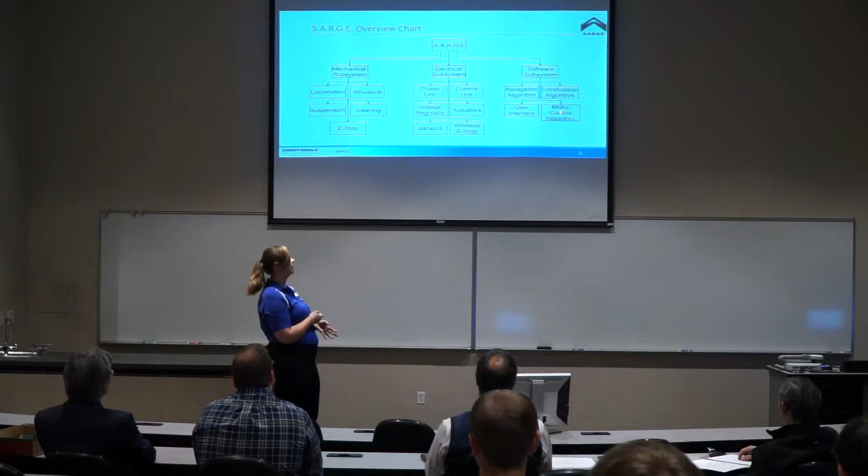So S.A.R.G.E. has several requirements, but there were some that were just too broad to fit into a specific subsection. So we put them in our overall system requirements and specifications. The first is that we need to build the robot entirely by the team. IGVC allows us to start with a pre-made system and build up from it, but because this is capstone, we wanted to start from scratch, build from the ground up, so we get to learn every aspect of it. The second is to stay within budget.

We have a total budget of about $6,000 for our robot. That includes money from URI, thank you very much, the College of Engineering, and a private donor. Our third is to complete an IGVC course run. A lot of teams go to the IGVC and they don't even make it through the course. Last year, the third place winner made it 44 feet into the course. So our goal is to at least make it around once, and hopefully after that, beat the time from last year, from the team who didn't make it around.

Our fourth, as I already talked about, is our search and rescue purposes. We really want this to be something that will work after capstone, not just competition oriented. And as I already stated, that includes having the payload of survival supplies, having the ability to walk survivors out within a 1.5 kilometer range, and then being able to create communication between survivors and rescuers in a 50 kilometer range, probably through a walkie-talkie or something like that.

And then finally, our last requirement is to win the competition, which is a very vague statement. But that means completing the course in under 4.01 minutes, because that was the winning time last year for IIT Bombay. We want to get 85% of our design competition points and 70% of our interoperability profiles challenge, which hopefully again should place us at the top.

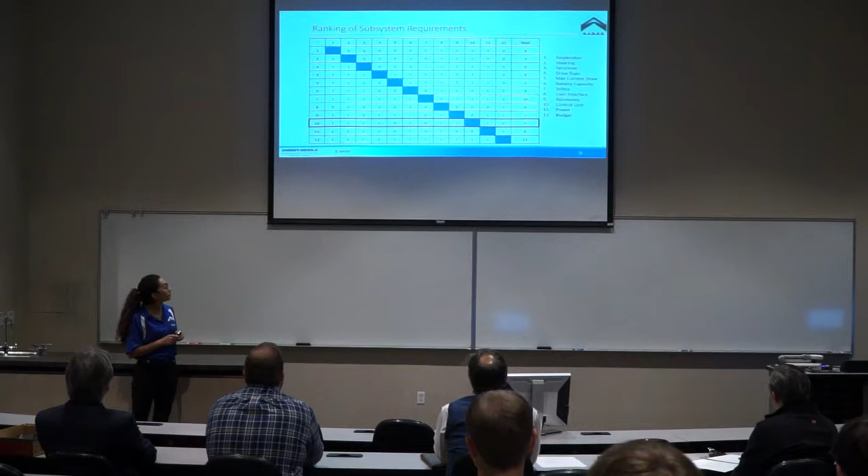So to explain this table a little bit more, we're going to pick an example, which is the control unit. So here you can see that in the first cell, we evaluated the control unit with the suspension, and we gave it a 1. We did the same thing for the steering and structure. And then for number 4, we evaluated the control unit with the drivetrain, and we thought the control unit was less important than the drivetrain. Therefore, we gave it a 0. So after that, we just sum up the row, and then we end up with the total score. The maximum total score we could get is 11. So for the control unit, we got a score of 7.

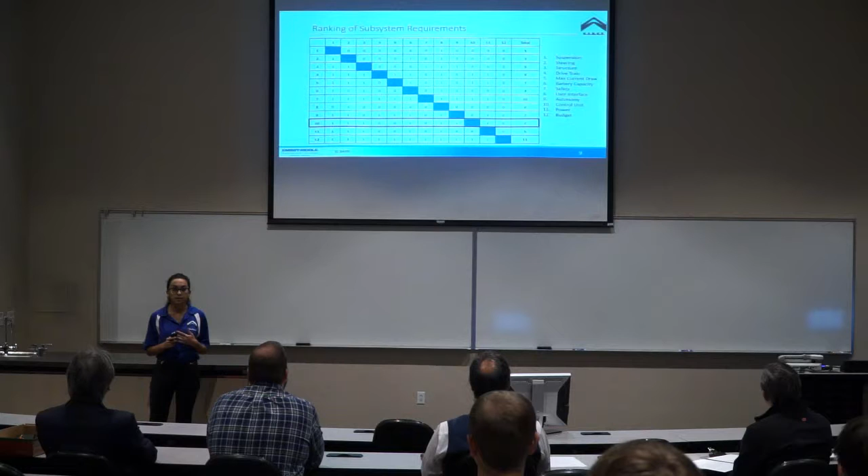So in this table, you can see that the budget has the highest score with an 11, and safety has the second highest score with a 10. So these total scores will help us rank the requirements. Here we can see that budget and safety have a percentage of 20%, the drivetrain 15%, 7% for control unit, autonomy, and maximum current draw. We give 6% for structure and power, 4% for battery capacity and steering, 3% for suspension, and 1% for user interface. And you can see that the total comes out to be 100%.

And now I'll pass it on to Matthew.

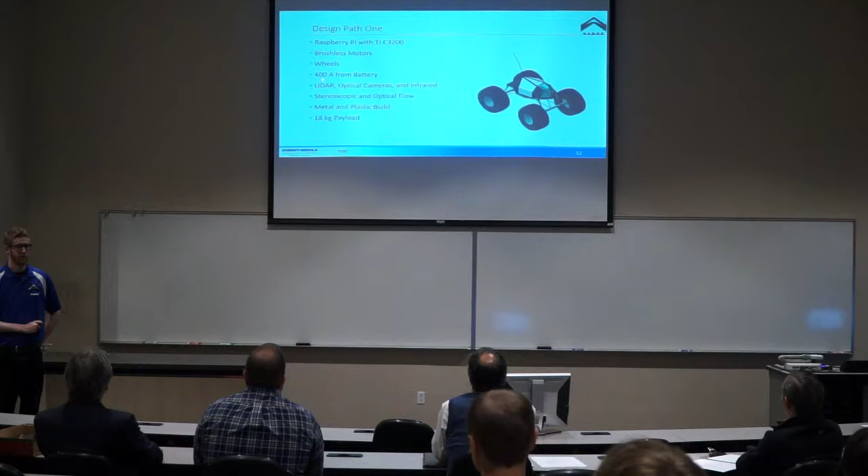To reiterate, design path 1 would be using the Raspberry Pi and TI CC3200 for Wi-Fi communications, brushless motors to operate the wheels pulling 400 amps from the battery, LiDAR and optical cameras for stereoscopic and optical flow algorithms, a metal and plastic build, and supporting 18 kilograms of payload.

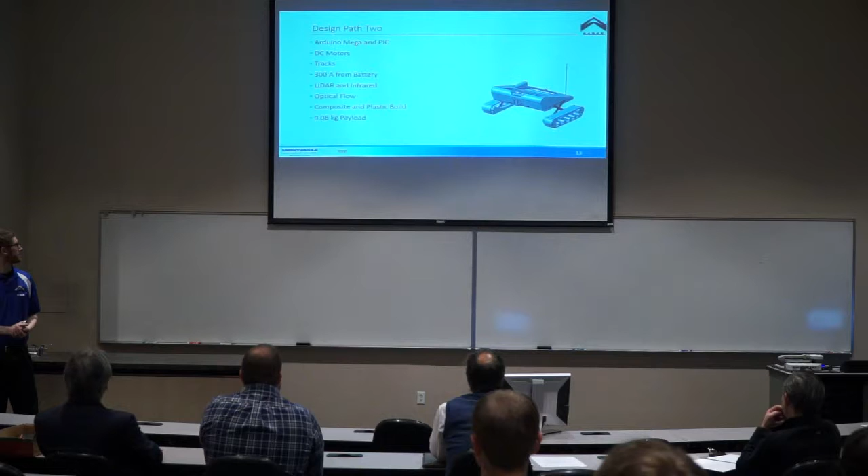The second design path that we considered is using an Arduino Mega and PIC microcontrollers, DC motors to operate the tracks, 300 amps being pulled from the battery, LiDAR to incorporate optical flow algorithms, infrared sensors, and a composite and plastic build supporting 9 kilograms of payload.

Our third design path is using the Raspberry Pi and BeagleBone, AC motors to operate the wheels pulling 200 amps from the batteries, using optical cameras for the stereoscopic algorithms and infrared sensors, a metal and composite build, and 18 kilograms payload support. I'm going to pass it back off to Morgan, who's going to summarize our design paths.

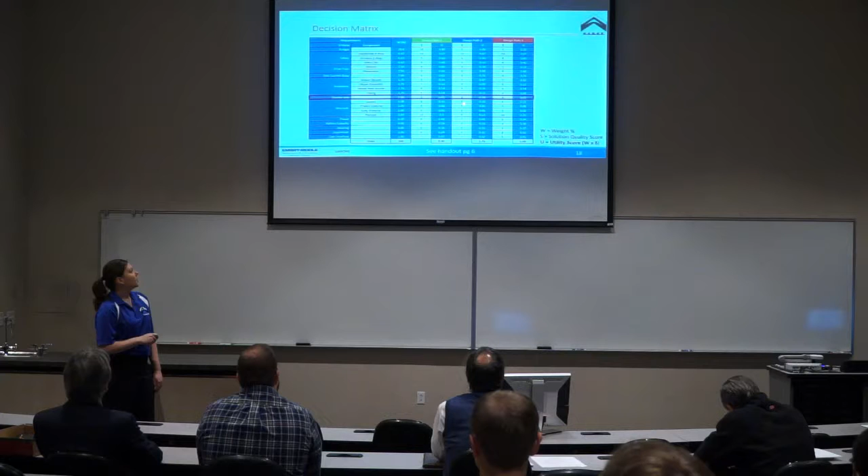To do this, we multiplied each score for the component or criteria by their associated weight to give us a utility score. Continuing with the control unit example, for design path 1 and 3, we gave it a score of 9 multiplied by a weight of 7% to give us a utility score of 0.63. For design path 2, we gave it a score of 8, once again multiplied by 7%, to give us a utility score of 0.56.

We did this for each of the components and criteria respective to their design paths, and then summed up each design path's utility score to give a total utility score. We then determined which design path had the highest total utility score, which, as you can see, is design path 1, which has a total utility score of 8.80. Therefore, we chose this design path to implement, which was stated previously.

Additionally, it will have a 4-link suspension and a linearly actuated steering system. And I will now pass it off to Grayson for the mechanical subsystem.

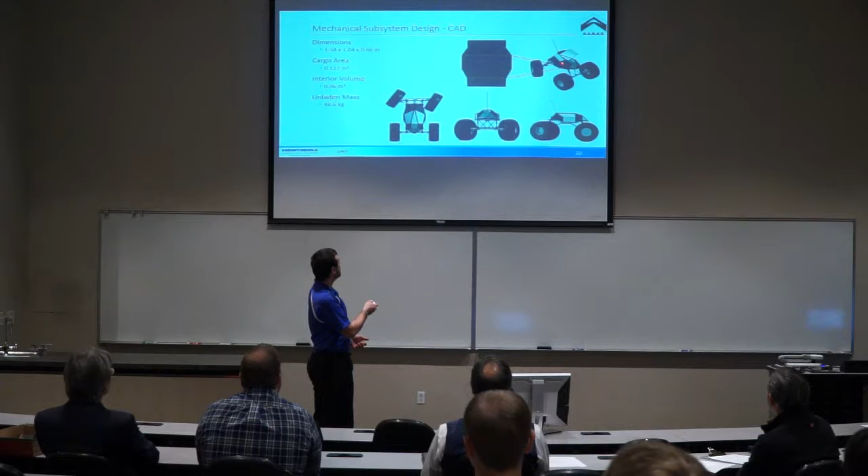Here's a current CAD model developed inside CATIA for our prototype. The dimensions of this vehicle are 1.34 meters long by 1.04 meters wide and 0.66 meters tall. In this model, we have a cargo area shown here in this blown out view that has an area of 0.127 meters squared and a total interior volume of 0.06 meters cubed. The unladen mass is 48.6 kilograms for this vehicle.

For the finite element analysis, we looked at 4 main components that we'll show in this presentation today. We took into account welds for this to get a more accurate simulation, so we implemented fillets into the model, and then assigned the correct materials to each of them. For this first one, we used an aluminum 6061-T6 and also implemented this cross section here throughout.

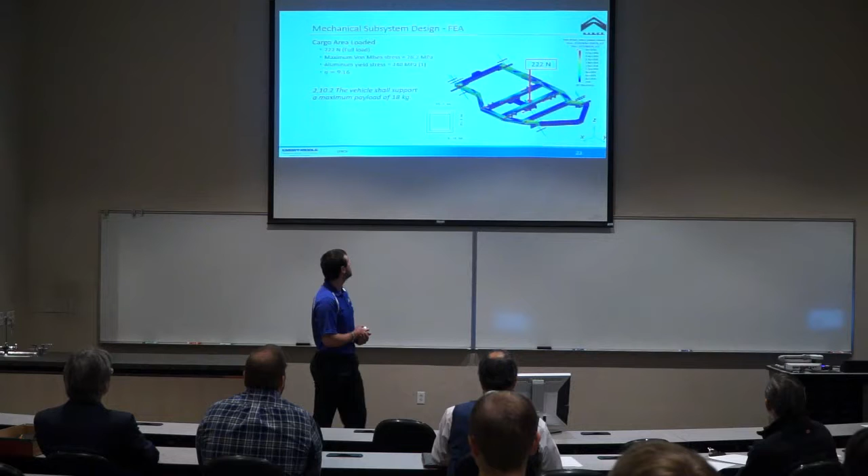We were analyzing to see if we were within our requirement 2.10.2, that we would be able to support a maximum payload of 18 kilograms. So that's what we implemented as a 222 Newton force, shown here. We found in this analysis that the maximum von Mises stress was 26.2 megapascals. The aluminum that we have chosen yields at 240 megapascals, so that gives us a factor of safety of 9.16.

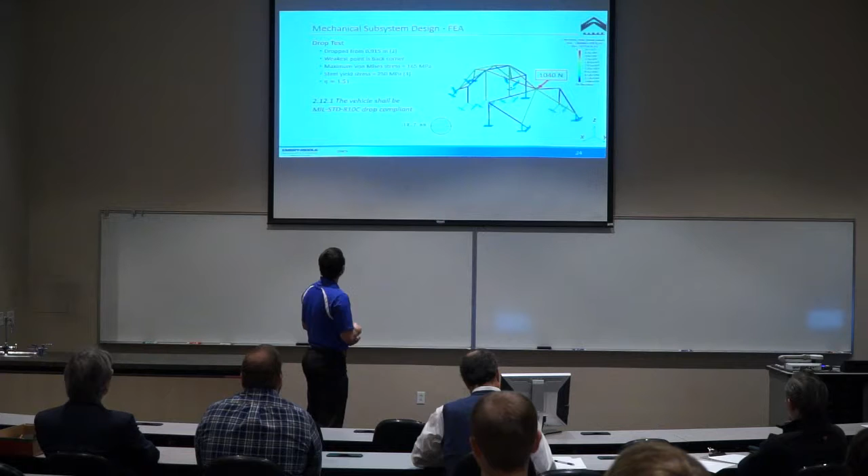For our second finite element analysis, we looked at the roll cage. Specifically, we wanted to make sure that our roll cage would match our requirement 2.12.1, that our vehicle would be compliant with the military standard 810C. This requirement specifies that a vehicle of our size must be dropped from a height of 0.6 meters or lower and still be fully functional after the drop.

So in order to account for this, we dropped it from the back on top of the roll cage at the weakest point shown here. This is the entire mass of the vehicle on this thing, so that comes to about 1,040 newtons of impact. We dropped it from a height of 0.915 meters to take into account any extra, and to make sure that we will fulfill our requirement of 0.6 meters.

The maximum von Mises stress found in this analysis was 165 megapascals, and this roll cage is made from a steel that has a yield stress of 250 megapascals. This gives us a factor of safety of 1.51 for our design.

For the third finite element analysis, we looked at the axle. We wanted to make sure that the axle will be able to support our robot at full load statically, and we found it was able to. We calculated that the axle would have 400 newtons of force on each tire when at full load of the robot, so the maximum von Mises stress was only found to be around 6 megapascals.

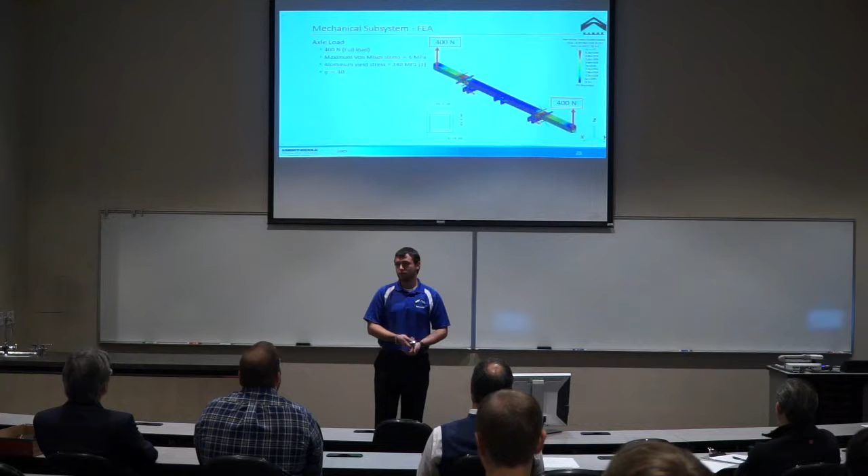The aluminum is the same aluminum we used in the chassis with the same cross section shown here, and it had a yield stress of 240 megapascals, so that gives us a factor of safety of 40 for this part. Should be plenty enough.

For the final finite element analysis, we looked at the total suspension system inside of ANSYS. We wanted to make sure that the linkage arms shown here would be able to withstand the inertial forces of the robot at full speed and at maximum turn, that's 2.2 meters per second at 50 degrees turn on the wheels.

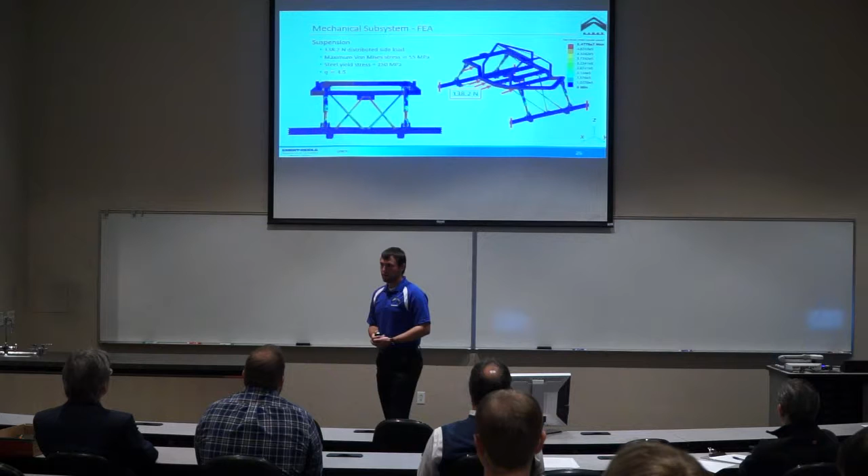We calculated that the inertial forces in the body would be 138.2 newtons, which we distributed along the force here. In this calculation, we found the maximum von Mises stress to be around 55 megapascals. Again, these links are made from the same steel as the roll cage, which has 250 megapascals of yield stress, so this gives us a factor of safety of 4.5.

I'll now pass it on to Chad to speak about the kinematic simulations.

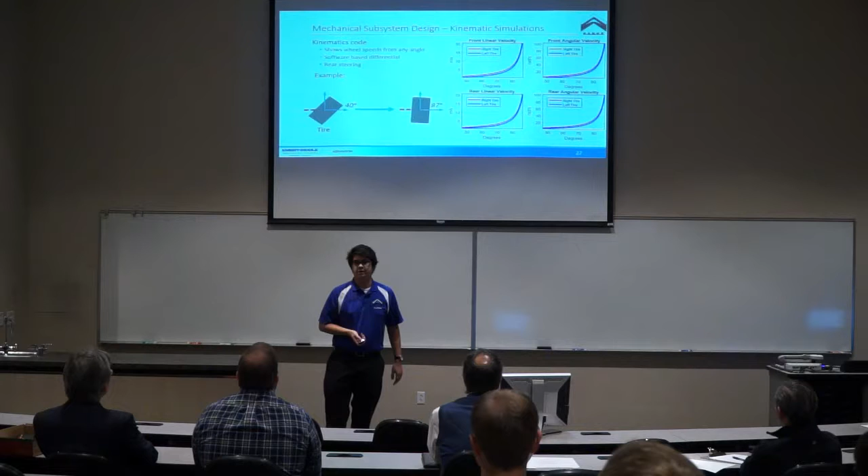Thank you, Grayson. So we ran some kinematic simulations of our robot on MATLAB, and the kinematics code shows the wheel speeds on a full turn going to a straight turn. Being that each wheel is independently driven by its own motor, we are implementing a software-based differential instead of a hardware or mechanical differential typically seen in automobiles. We are also putting the steering system on the rear axle.

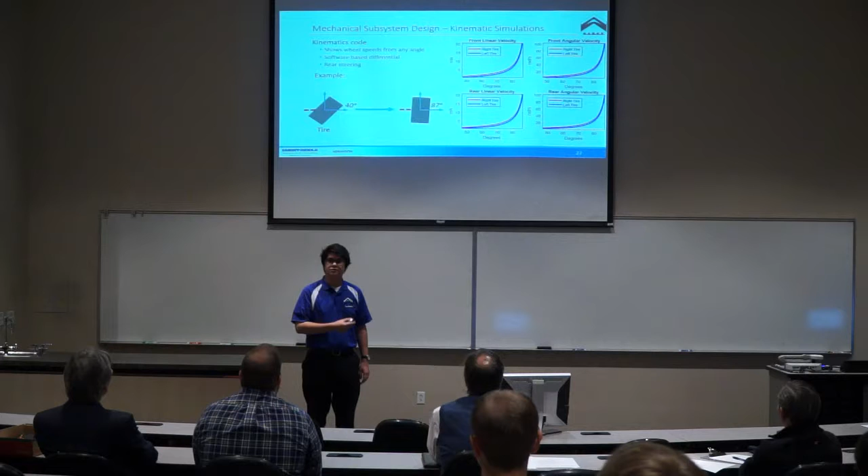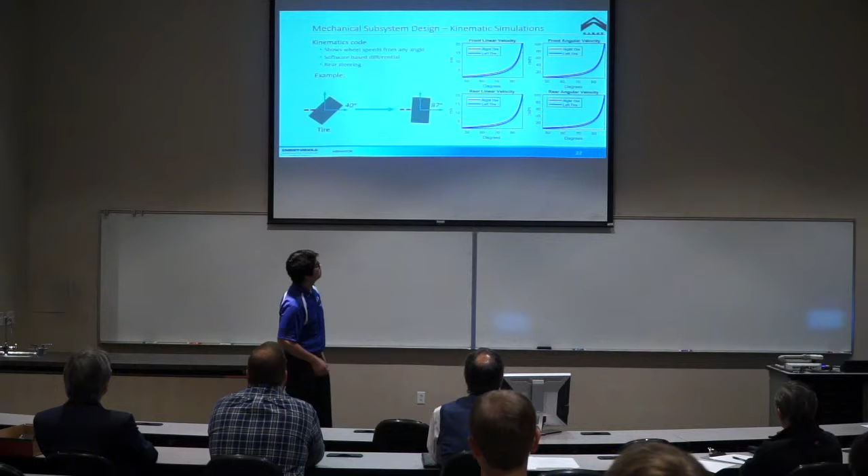So this robot is undergoing a left turn in the simulation, even though it shows that the wheels are turning right. In this simulation, the right side tires are shown in red, the left is shown in blue, and throughout this left turn, the right tires are moving faster than the left, which is as expected. So we know that our simulation is correct. These two graphs right here show the linear velocity in meters per second, and these two show the angular velocity in radians per second.

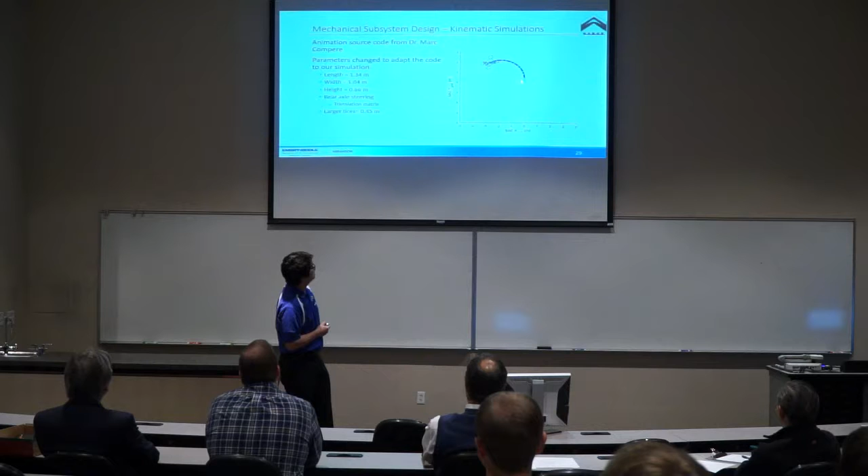Here is an animation of the kinematic simulation. The animation source code came from Dr. Marc Compere, a professor at Embry-Riddle-Daytona. The parameters we changed on this code are the critical dimensions of the robot: length, width, height, and tire size, and we changed the steering axle to the rear, which was accomplished by modifying the translation matrix. The purple dotted line shows the center line of the front axle, and the light blue line, a little hard to see, shows the center line of the robot itself. You can see that they are offset, so our simulations are moving as we expect.

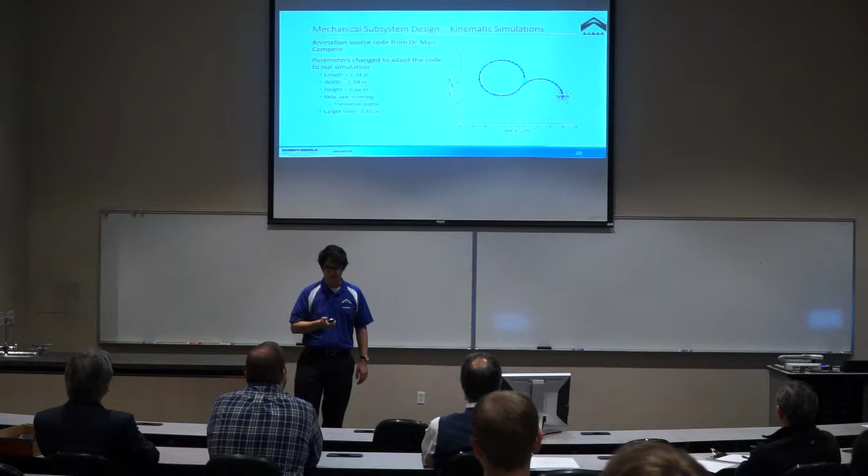For our motors, we are going with RacerStar 6368 brushless DC motors. We will be attaching their output shafts to a planetary gearbox with a gear ratio of 100:1. The resulting peak torque per motor is 169.5 Newton meters, and the nominal or standard operational torque of these motors is 59.3 Newton meters. The total nominal torque of the robot, multiplied by the 4 motors we will be using on each wheel, comes out to 237.2 Newton meters, which satisfies our specification 2.2.2, where we say the actuators shall move the robot with a total minimum torque of 160 Newton meters.

For the steering system, we're using an electronic linear actuator from Firgelli Automations Incorporated. This linear actuator has a maximum pushing force of 750 newtons, and it moves at a speed of 7 millimeters per second. This linear actuator satisfies our specification 2.3.2, where we say the steering system shall have a minimum force of 200 newtons.

Now I'll pass it off to Grayson to wrap up the mechanical subsystem.

Thanks, Chad. This can be found on pages 2 through 4 as the requirements specifications. We'll be looking here at the mechanical column. For the first, we were under budget, so that satisfied that requirement. We have a practical locomotion system. Our steering mechanism is on the rear axle. We have satisfied our structural component. The suspension is being designed in order to accommodate the requirements. The mechanical e-stop is located on the rear of the vehicle as a large red button. We are within IGVC dimension requirements and will be able to traverse uneven terrain.

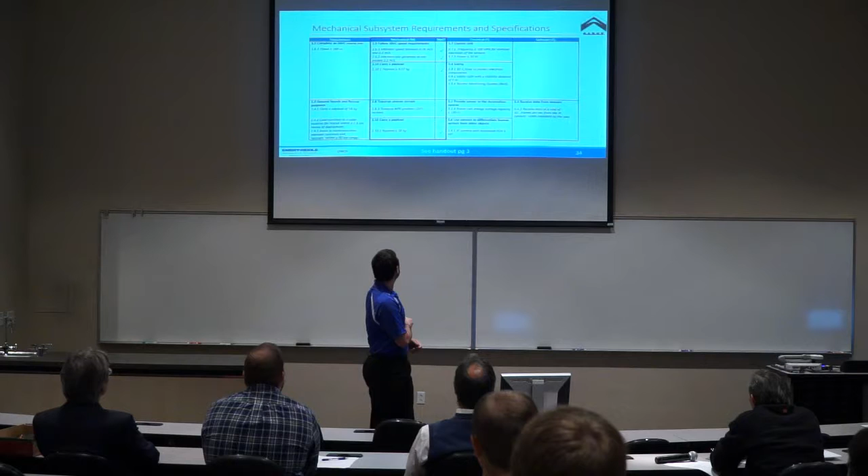We have followed along with IGVC speed requirements and any other requirements throughout the development of this vehicle, so we satisfied that. We will be able to carry a payload from 9 to 18 kilograms, and we'll be able to go up a gradient of 44% with our chosen motors and gearbox ratio. We'll also be IP56W compliant with the body materials we're using for this vehicle, and we'll be drop resistant to military standard 810C.

I'll now pass it to Sarah to talk about the electrical subsystem. Thank you, Grayson.

So now we're going to talk about the electrical subsystem with its components, and then we're going to talk about the design, including the motor driver system, the motors, the battery, the cameras, and the sensors. Then we're going to see if we have met our requirements and specifications. Our four main components are safety, power system, control unit, and sensors.

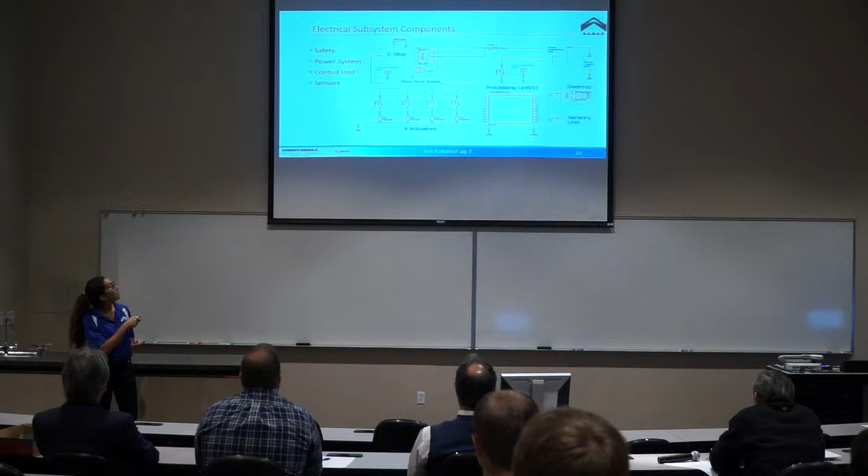Here's a general schematic of our design. We have the battery right here, and it will go through a power distribution unit, which will distribute power to all of our components. Then we've got the control unit over here. It will get data from the sensory unit, and after processing that data, it will pass it on to the steering system and then to the motor driver system. The motor driver system has 4 actuators. For safety, we have an e-stop, mechanical and wireless, for any kind of safety issue. If we want the robot to stop moving for any reason, it will cut off any communication between the power and the motors. Now, Randy Griffin will talk more about the motor driver system. Thank you, Sarah.

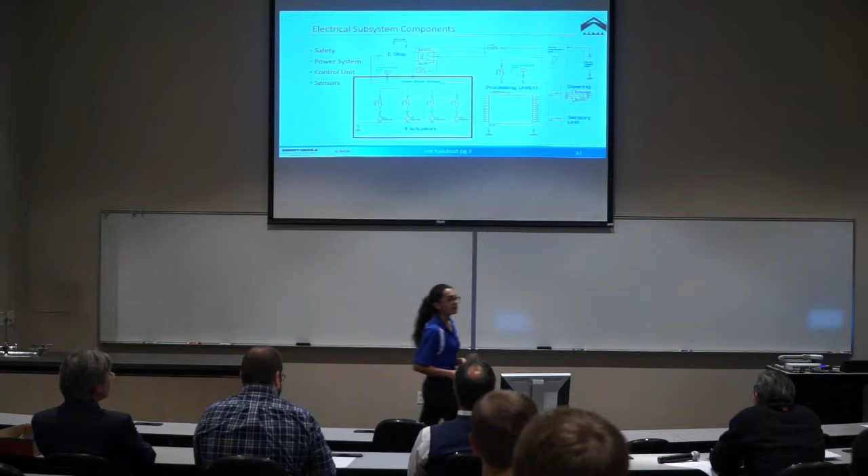So for the motor driver system, first we have the battery, and on here we are using 24 volts. That 24 volts is going to be sent through a low dropout regulator, or LDO. The reason for using an LDO is because they're typically pretty good at mitigating a lot of noise, and with all the motors and electrical sensors that we have, we anticipate a lot of noise, so we're using an LDO to compensate.

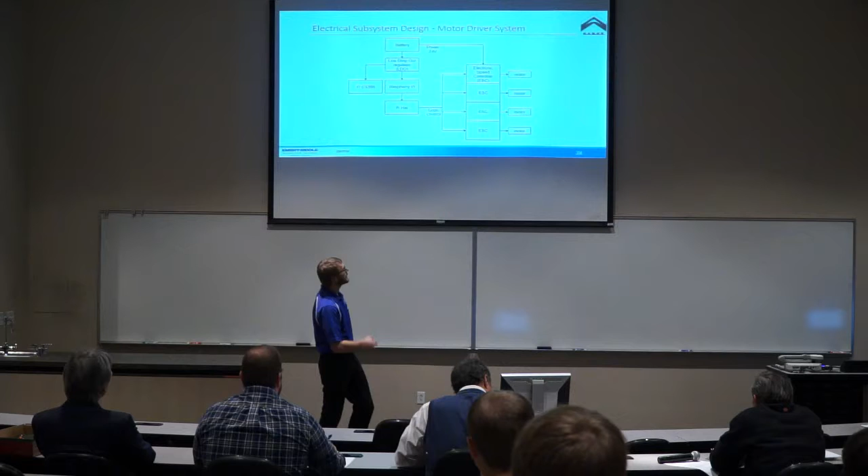From there, that's going to be used to power the TIC3200 as well as the Raspberry Pi. On top of the Raspberry Pi, we're going to have a pulse width modulation generator, or PWM module, and from there that will pass a PWM to each of the electronic speed controllers, or ESCs, which in turn will power each of their individual motors.

For the motors, we are using the RacerStar 6368s. They're rated for a KV of 280. KV stands for revolutions per minute per volt, and this results in 8,400 RPM at 30 volts, which is the highest voltage we are going to be running. The motors are rated for 12 to 50 volts, which falls above and below the range of the battery. They are rated for 480 watts nominally.

At 20 amps, and they will peak 1,440 watts at 60 amps. For the speed controllers, we are using the VESC FOC ESC, which stands for Field Oriented Control. Those are also rated for 12 to 50 volts, which falls within the range of our battery. They're able to supply 60 amps continuous, as well as a 120 amp peak for 10 seconds. This satisfies our requirement of 3.4.1, where a minimum of 1,600 watts shall be supplied to the actuators.

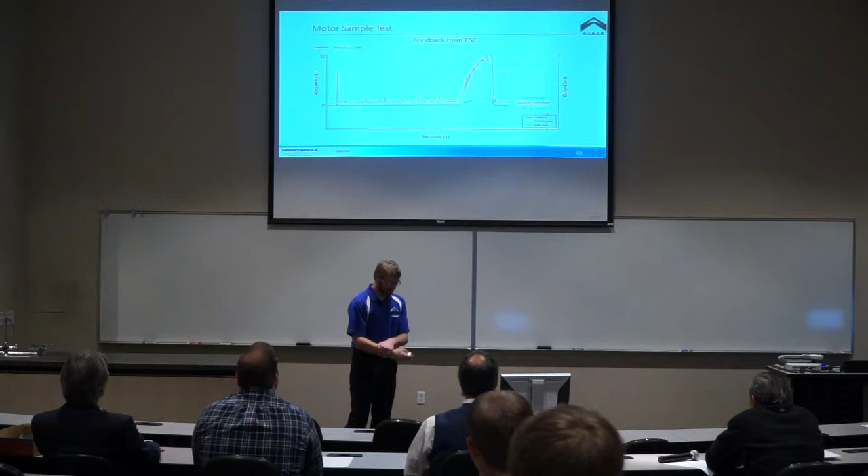This is a sample motor test that we ran. The blue line is the current into the ESC, and the red is the corresponding current supplied to the motors, and the green line is the duty cycle being sent as a PWM into the speed controller. Here, we attempted to do a stall on the motor, and that's why there's a large current spike, and it spiked up to roughly 10 amps. As a result of that, this was the RPM of the motor. You can see that at this spike, there's almost no change in the RPM. So that shows us that the motors are very capable of handling a high stall torque.

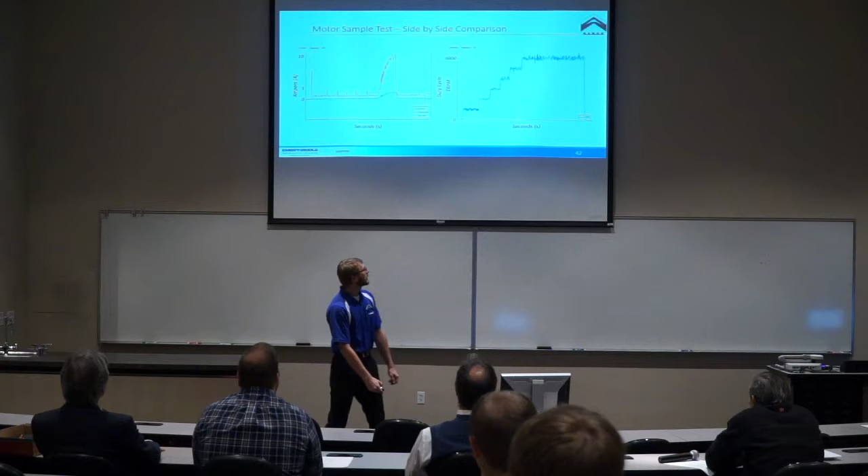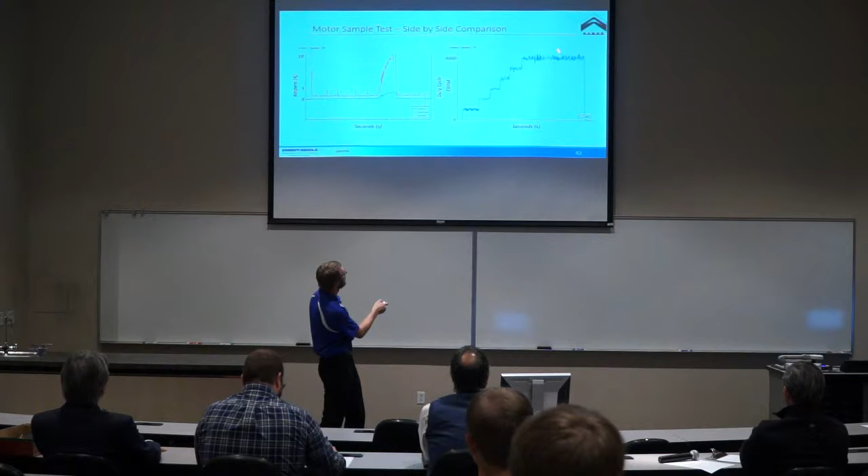Here are the two charts side by side as a comparison. We started at 1,000 RPM and jumped up by 1,000 every time until we went up to 6,000. Then that's when we attempted to do a stall as far as the power supply would let us. Again, here's the current spike, and here's the output of what is happening to the actual motor. So as you can see, even though we attempted to stall it, it did an outstanding job of maintaining a stable RPM.

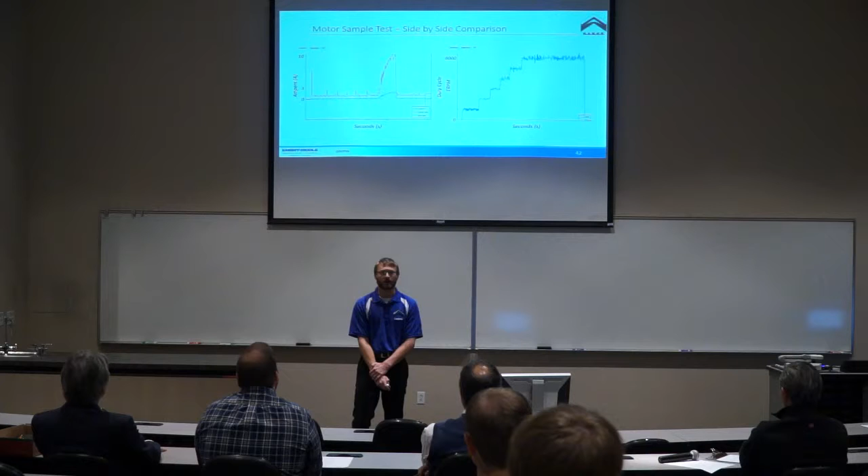Now I'll pass it off to Matt to describe more about the battery.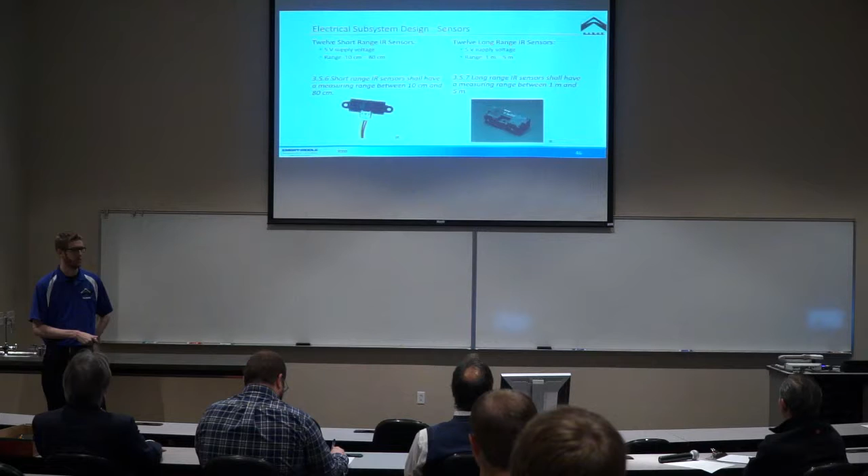This is more information on the infrared sensors we'll be using. Again, the short range sensors will be on the undercarriage for cliff detection and range from 10 centimeters to 80 centimeters, satisfying our specification of 10 to 80 centimeters. And then 12 long-range infrared sensors will be 1 to 5 meters, satisfying our specification of needing at least 1 meter to 5 meters. Lastly, our LiDAR is going to have a horizontal view of 100 degrees, satisfying our specification of 70 degrees. It will operate at a range of 6 to 9 meters, which satisfies our specification of 6 meters.

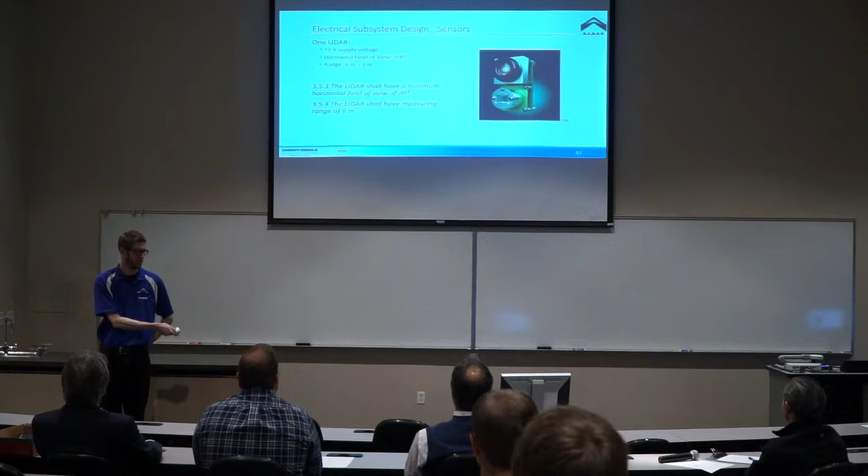And I'm going to pass it back off to Sarah to summarize our specifications.

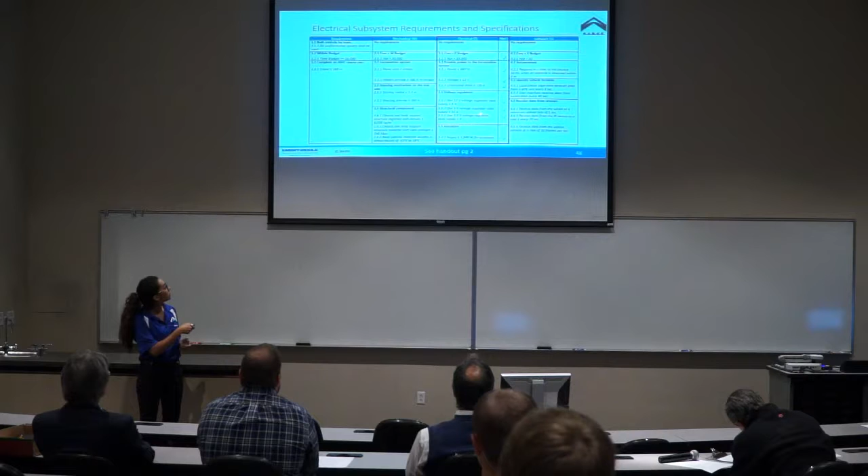As you can see here, and you can also find this table on page 2 of the handout, we have met all of our specifications. Our vehicle's electrical subsystem will be under $3,000, and we have met the specifications in relation with the IGVC, including power, actuators, and voltage regulators. Also, for all the sensors, the control unit, and safety, we have met all the specifications. For the search and rescue purpose, we also have met the specifications regarding power and sensors, and of course safety and having a design that is weather resistant and drop resistant.

And now I'll pass it on to Garrison for the software subsystem.

Thank you, Sarah. So I'm going to be talking about the software subsystem components, design, and then we'll go over if we've met the software subsystem requirements and specifications. The design consists of the navigation and localization algorithm, the motor control algorithm, a graphical user interface flowchart, and then a demo for the graphical user interface prototype and a demo of the LiDAR prototype. As you can see here, this is a prototype of our graphical user interface made in Python. As of right now it's very simple, but you'll see that later in our demo.

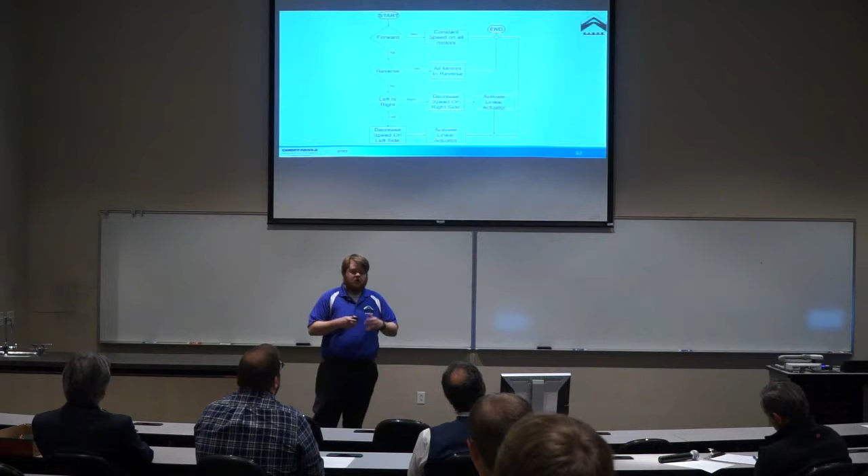So I will now pass it on to Jackie to talk about the graphical user interface.

Thank you, Garrison. As previously stated by myself and by Garrison, we do have a graphical user interface. It is going to take the form of a very simple program on a laptop. The way this works in our algorithm is that the GPS position, the battery level, and the speed are all read into it, and it will then display this out to the user.

The program checks to see if the GUI has been closed at any point. If it is, it'll stop bringing in data. If not, it'll constantly keep bringing in that information. It also checks to see if the e-stop has been activated, so that if we lose contact with the vehicle, we know the GPS location it was last at. It keeps continuously storing this information because we are putting this into a search and rescue environment. We need to know where it is if we lose contact.

The new GPS target is, as I mentioned before, how SARGE can lead victims out to a safer location. This is what the search and rescue team would plug in, and it's about the new destination telling our vehicle to go to that position. Open pulls up a list of all the past GPS locations, so we can always find it.

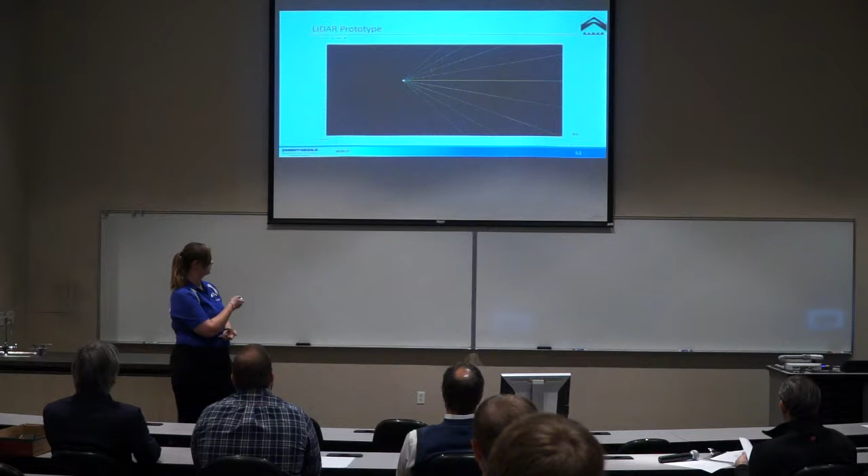This is a demo of our LiDAR. We fortunately received this recently and have been doing some preliminary investigation into it. It's a little hard to see, but these white lines that are moving are us moving in front of the LiDAR. It's a little easier to see on our graph. All these dots are ourselves, or computers, or various objects in front of the LiDAR. It's spitting out the information we would expect, which is a distance to each point and an angle to it, so we can navigate around the obstacles we are going to approach in both the competition and in the search and rescue environment.

I'll now pass back to Garrison to talk about our requirements and specifications.

Thank you, Jackie. You can see these requirements and specifications on pages 2 and 3 of your handouts. We came in at budget because we didn't have a budget, so it was $0. The autonomous system, as we've designed it right now, will meet all of the requirements that we have specified.

For the IGVC, we have the wireless communications. The launch pad chosen by the electrical team meets the software requirements for this. And the sensors that have been chosen have so far met our requirements.

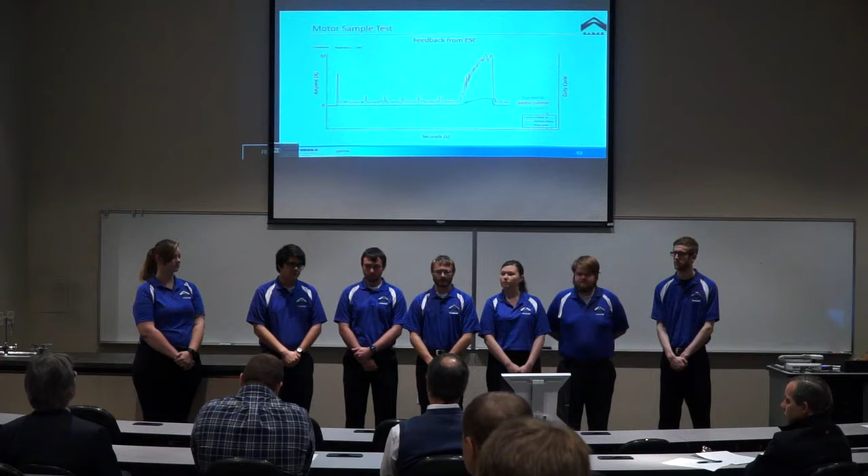So on the charts regarding the selection of the design path that you chose, there were 3 design paths and roughly 10 or so subsystems being evaluated on each of those. The choice on many of those subsystems I would expect to be independent of each other, so the number of permutations of design paths is much larger than 3. How did you get down to 3?

Dr. Gentilini told us honestly to pick 3. So we tried to pick the ones we thought would be most logical. We sat there and debated back and forth between each other what we wanted to use, why we wanted to use it, and spent about 2 weeks going back and forth, coming up with a whole list and narrowing it down to what we thought would be the most useful and most likely to work.

Was there any consideration given to evaluating which subsystems were independent of each other, which decisions were independent, and then doing a subsystem level optimization across the many selections? I think maybe a little bit subconsciously, yes. I think mostly it was just, we know these things should work, let's try them, let's test them out, and using our knowledge from past classes, let's go forward with these.

Thank you. And one other question, there were, in each of the subsystem presentations, you alluded to the design specification, but it wasn't clear to me where those requirements came from. So if you look in your handout, we actually have an entire document, our specifications and recommendation sheet, that will break down where all of those came from.